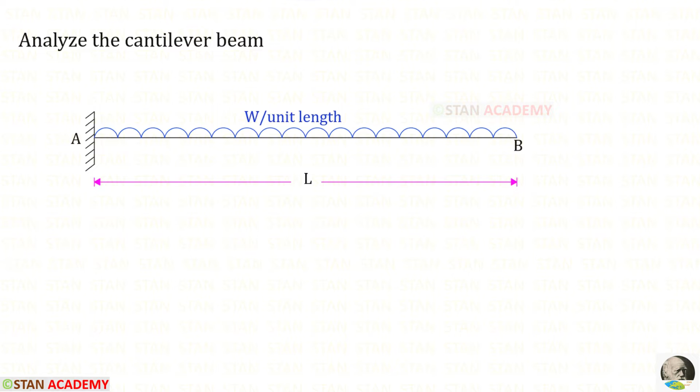In this beam, we have a uniformly distributed load W per unit length. It is acting for the whole length. Now let us apply this rule and find the vertical reaction RA. RA is acting upwards, so it will be positive. The UDL is acting downwards, so it will be negative. We have to multiply the UDL with the length L, so the total load will be WL. For RA, we will get WL.

To find MA from the point B, let us take a moment about A. In this case, we have to follow the left-hand side rule. Clockwise will be negative and anticlockwise will be positive. The UDL is acting in the clockwise direction, so it will be negative. The shape of the UDL is a rectangle. We have to multiply the area with the centroid distance. The area is W into L. The centroid distance from the center to the point A is L by 2.

So when we find the moment for the UDL, we have to multiply the load with the distance and then the distance by 2. MA will be acting in the anticlockwise direction, so it will be positive. For MA, we will get WL square upon 2.

Now I am going to find the shear force values from the point A towards the point B. In this case, we have to follow the right hand side rule. Upwards will be positive and downwards will be negative. The shear force at just left of A is 0. The shear force at just right of A will be WL. It is acting upwards, so it will be positive.

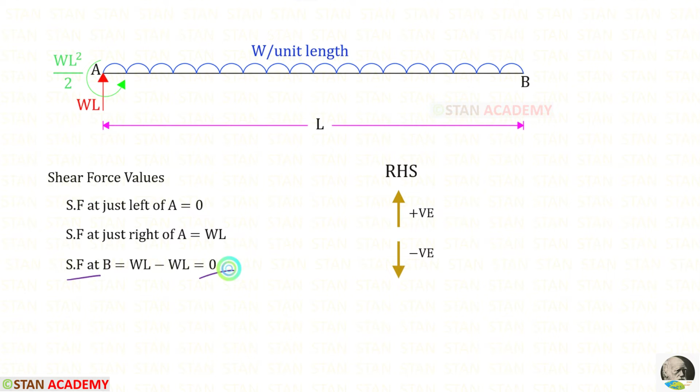Let us find the shear force at B. It is acting upwards, so it will be positive. The UDL is acting downwards, so it will be negative. For the UDL, to get the total load, we have to multiply the load with the distance, so it will be WL. For the shear force at B, we will get 0. This is the shear force diagram.

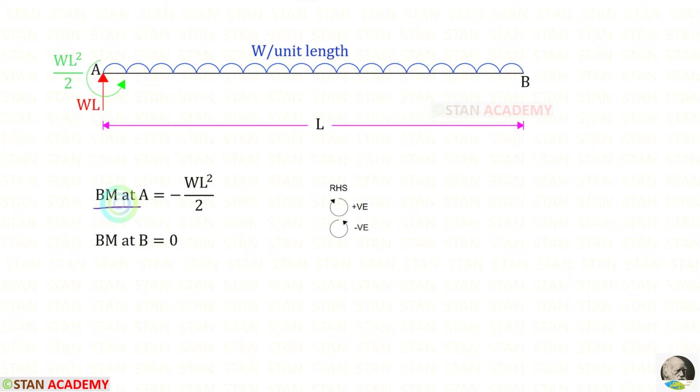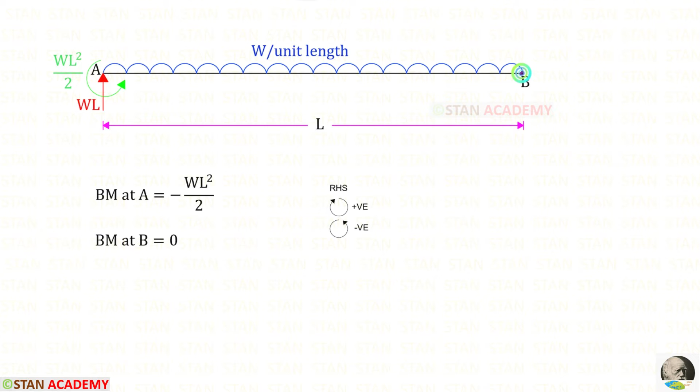Now using the right hand side rule, we can find the moments. Let us find the moment at A. At the point A, we have MA which is acting in the anticlockwise direction, so it will be negative. We know that the moment at the free end B will be 0. Here you can see the bending moment diagram. The shape of the diagram will be a second degree parabola. Using this diagram, we can find the slope and deflection at the point B.

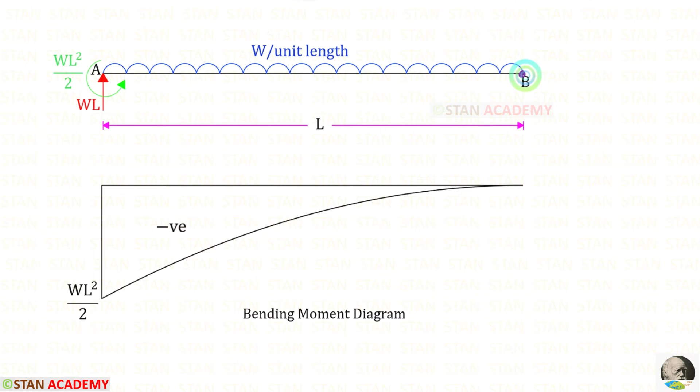The formula to find the slope is area upon EI. This is a second degree parabola. The area formula is 1 upon 3 BH. Here the breadth is L and the height is WL square upon 2. So this is the area. The area divided by EI gives the slope, which is WL cube upon 6 EI.

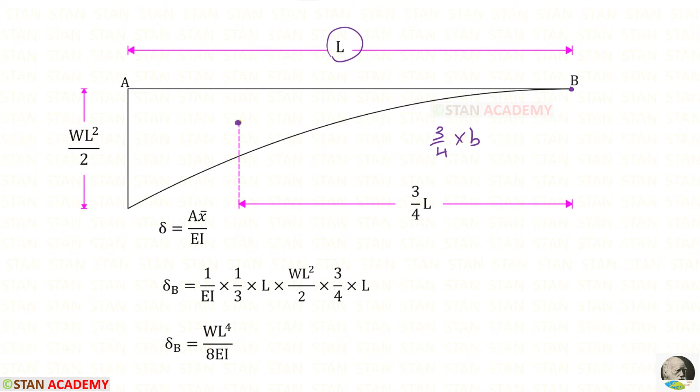Now we are going to find the deflection at B. The formula is area x bar upon EI. The area we know. The horizontal distance of the center of gravity from the point B is 3 upon 4 into breadth. Here the breadth is L, so it is 3 upon 4 into L. We have to multiply that. For the deflection at B, we will get WL power 4 upon 8 EI.

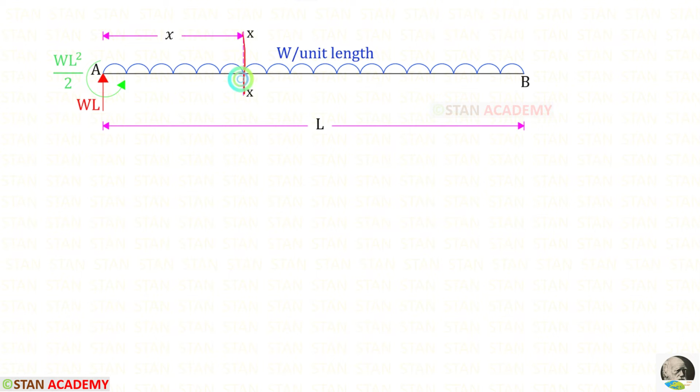Alternatively, we can find the slope and deflection at any point of the beam using double integration or Macaulay's method. We need to make a section in this beam. You can see that I have made a section at a distance of x from A. We have to find the moment at the section. I am going to find it from the point A. In this case, we have to follow the left hand side rule. Clockwise will be positive and anticlockwise will be negative.

MA is acting in the anticlockwise direction, so it will be negative. The reaction WL is acting in the clockwise direction, so it will be positive and the distance is x. The UDL W is acting in the anticlockwise direction, so it will be negative and the distance is x. We know that with the UDL we have to multiply the distance and then the distance by 2. x into x, it will be x square.

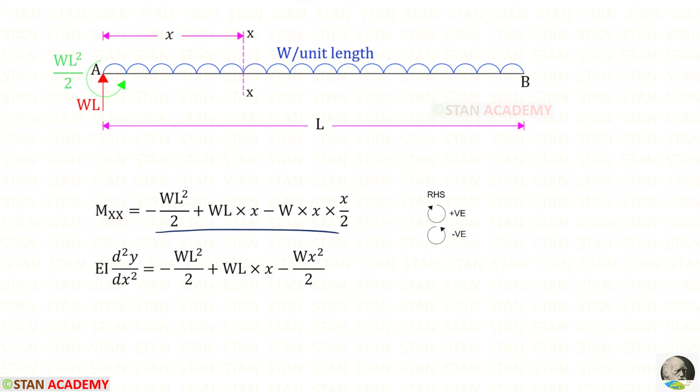We have to equate the moment with EI d square y upon dx square. We have to integrate on both sides. When we integrate this, we will get dy upon dx. We can integrate these three terms using this formula. In this term, there is no x, so the integration will be x. When we integrate x, it will be x square upon 2. When we integrate x square, it will be x cube upon 3. C1 is the constant.

2 into 3, it will be 6. One more time, we have to integrate on both of the sides. When we integrate this, we will get y. When we integrate x, it will be x square upon 2. When we integrate x square, it will be x cube upon 3. When we integrate x cube, it will be x power 4 upon 4.

In this term, there is no x, so we have to multiply with the x. C2 is the new constant. 2 into 3, it will be 6. 6 into 4, it will be 24. In the point A, there is a fixed support. In the fixed support, there will be no slope. dy upon dx is the slope. We know that from the section we have made.

In the point A, x will be 0. In this equation, for x and dy upon dx, we can apply 0. In this way, we will get C1, which is 0. Also, in the fixed support, the deflection will be 0. Y is the deflection. In this equation, for x and y, we can apply 0. In this way, we will get C2.

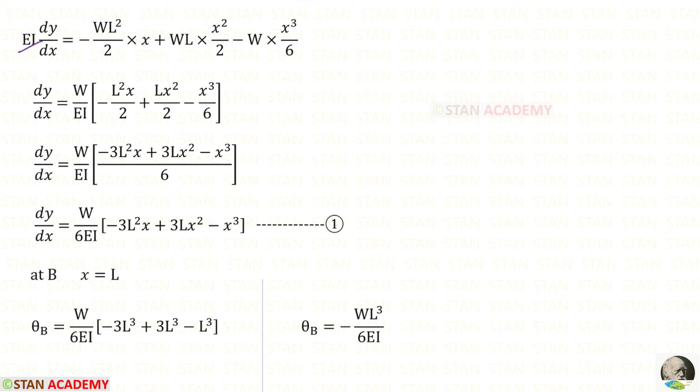In the slope and deflection equations, we can apply the values of C1 and C2 so that we will get these two equations. First, let us take the slope equation. We can take EI on the other side, so it will come in the denominator. We can take W outside. For these three terms, we can take LCM. Let us keep 6 as LCM. We will get this equation. Using this equation, we can find the slope at any point of the beam. Let us keep this equation as number 1.

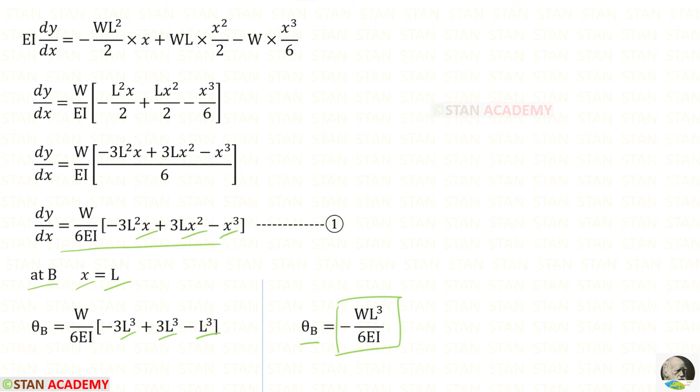Now we need to find the slope at B. In the point B, x will be L. So in this equation, instead of x, we have to apply L. In this way, for the slope at B, we will get minus WL cube upon 6 EI. Now let us take the deflection equation. We can take W outside and EI on the other side. It will come in the denominator. For these three terms, we can take LCM. Let us keep 24 as LCM.

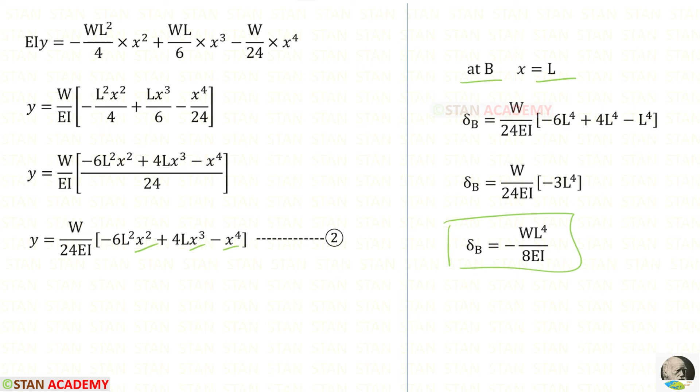This is the equation of deflection. Using this equation, we can find the deflection at any point of the beam. Let us keep this equation as number 2. To find the deflection at B, instead of x, we have to apply L, so that we will get the deflection at B, which is minus WL power 4 upon 8 EI. It is the elastic curve for the deflection. Here you can see the summary of what we have done. Using these two expressions, we can make one more expression.

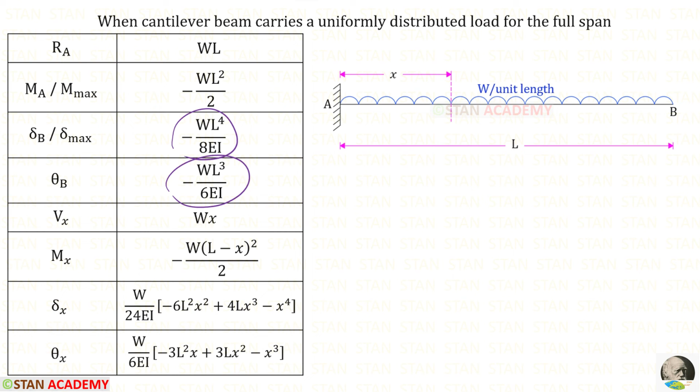Let us assume that the uniformly distributed load is acting only for a distance of A from the fixed end. To find the deflection and slope at C, in those two expressions, instead of L, we have to apply A. From C to B, there is no load, so the elastic curve will be straight. In this case, from the point C to the point B, the slope will be same. Let us take this triangle. In this triangle, we can use the tan theta formula. Tan theta C will be equal to the opposite side upon the adjacent side. Let us assume that the opposite side is y. The adjacent side is L minus A.

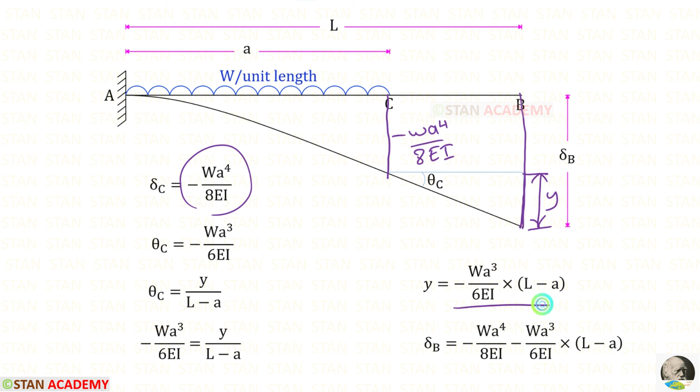The value of tan theta C will be very small. In this case, we can approximately take tan theta C is equal to theta C. So theta C will be y upon L minus A. We know theta C. We can apply that. We can take L minus A on the other side. It will come in the numerator. To find this height, we have to add this and this. This height is the deflection at C, minus W A power 4 upon 8 EI. This height is Y we have just found. We need to add both of them.

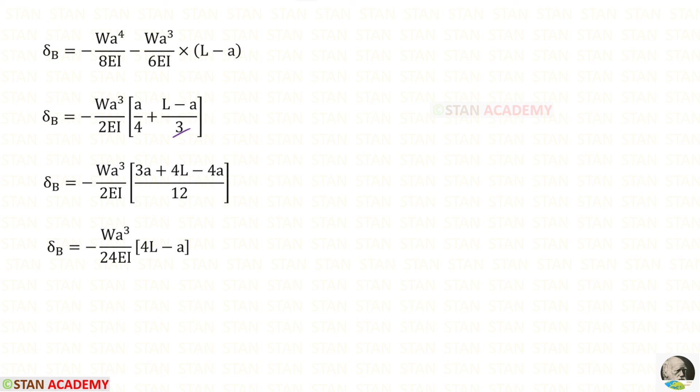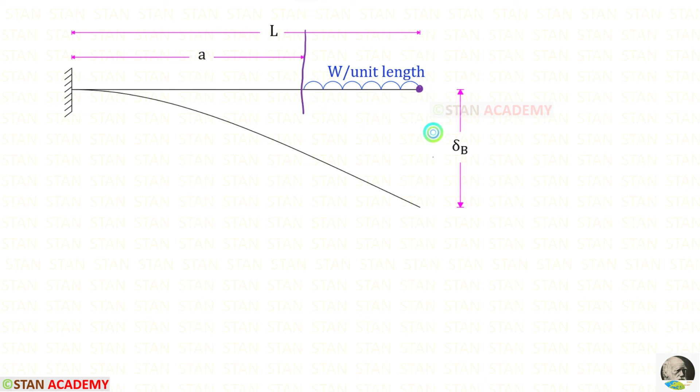From these two, we can take minus WA cube upon 2EI outside. For these two terms, we can take LCM. We can keep 12 as the LCM. Finally, for the deflection at B, we will get this expression. Suppose the uniformly distributed load is acting from the distance of A to the free end. We can easily make the expression for the deflection at B. From this, we have to subtract this. Here we have the negative sign.

So negative into negative, we will get a positive. We can take W upon 8 EI outside. We can take LCM. We have to multiply this with 3. 8 into 3, it will be 24. Finally, we will get this expression.